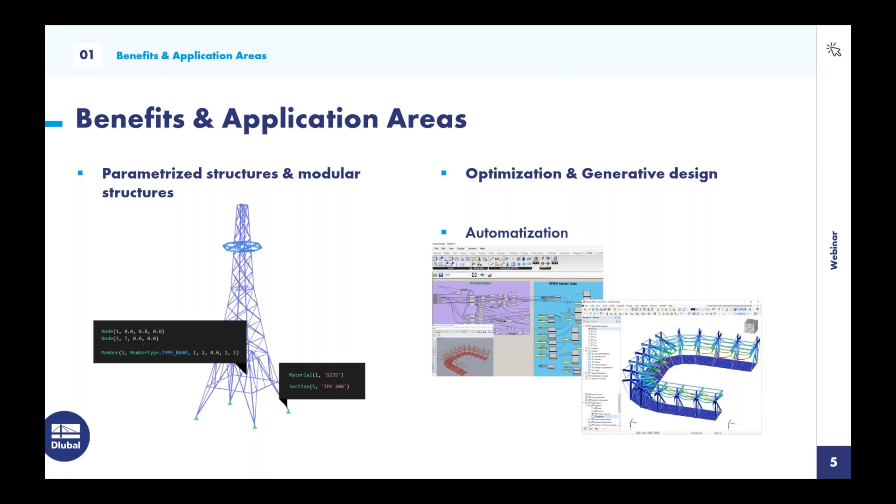Or it is possible to run size, shape, or topological design optimization algorithms. The most fun part is the ability to communicate between a wide range of software. Beyond that, one can create their own applications or own plugins on top of RFEM 6. There will be examples showing how to make that happen.

So what is an API? API stands for Application Programming Interface. It is basically a messenger. It takes requests, translates, and returns responses. It is a communication protocol between multiple software or services to interact with each other. To understand the concept better, here is an example. A graphical user interface is the communication protocol between humans and software programs. Most of you are using the RFEM interface and give the program commands with the help of buttons or inputs. Well, in our case, API has the same function between one software and another.

What are web services? Actually, web services are a form of API, and the distinction lies in style and the way of communication. Web services are XML-based information exchange systems. In our case, we are using an HTTP technology called SOAP, which stands for Simple Object Access Protocol, to make this connection happen. To use this connection in structural analysis and design, frameworks prepared by our team serve very basic functions, which enable the user to give RFEM commands and get responses.

So what's the difference between COM and web services, and why have we changed our technology? Well, RFEM 5 is a native Windows application. It only runs on Windows operating system. RFEM 6 is a platform-independent software which is compiled on Windows, Mac OS, and Linux.

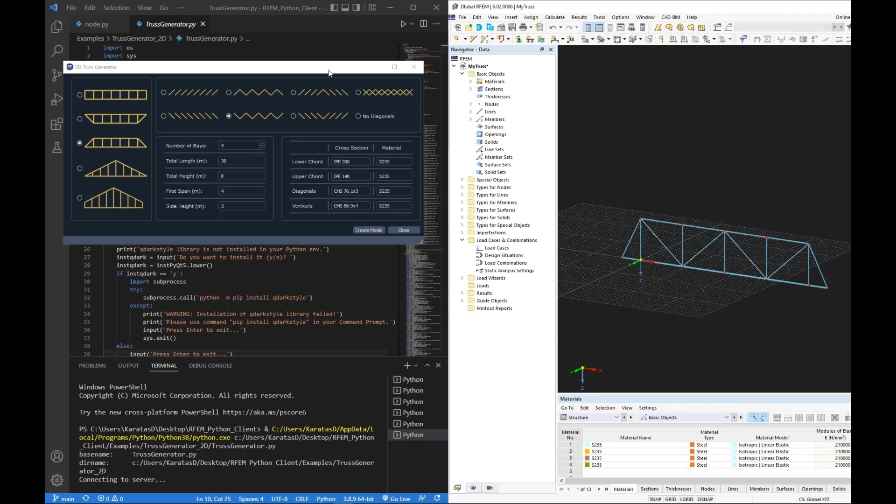Yeah, it's a cool example, I think, and I'm going to show you some other examples. Let me open my new folder. I have prepared some examples for the webinar.

Here I have a tank creator example, which is a console application. It takes 3 inputs for creating a steel tank. These inputs are diameter of the steel tank, height of the tank wall, and height of the arc.

If I'm going to run this file, there will be a new model named steel tank, and there will be some inputs in the terminal for the parameters.

Okay, my model is created, steel tank, and my terminal is asking me diameter of the steel tank. Let's say it's 12. The height of the tank wall, let's say 6. And height of the arc is 2.

I'm clicking enter, and objects are updating. Objects are updating in the RFEM now. And my tank is created.

If you would like to edit this script to your needs, you are free to do that and create your own console applications or your own graphical user interface.

It's that easy. Okay, now I would like to create an example from scratch, and I will be coding this and explaining every line step by step.

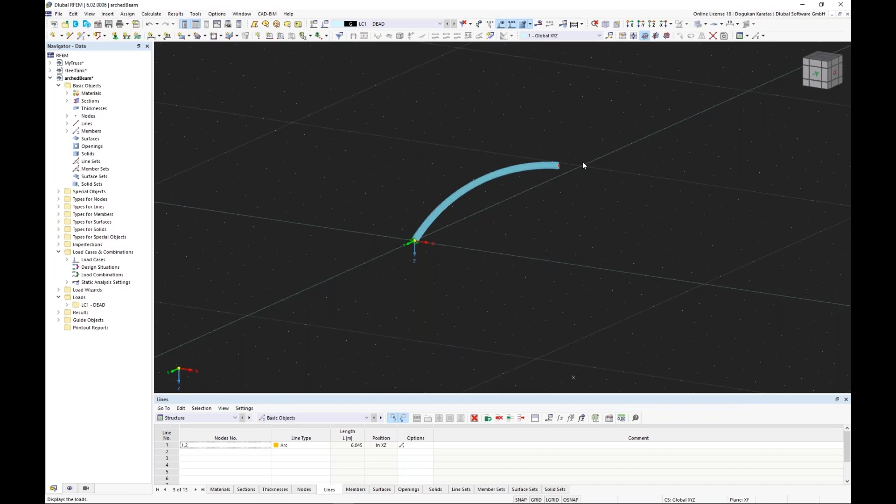And you can see the loading by clicking this. You can see this is a projected load. And of course, since we have calculated, the results are already ready. You can click the results and see them here in the model.

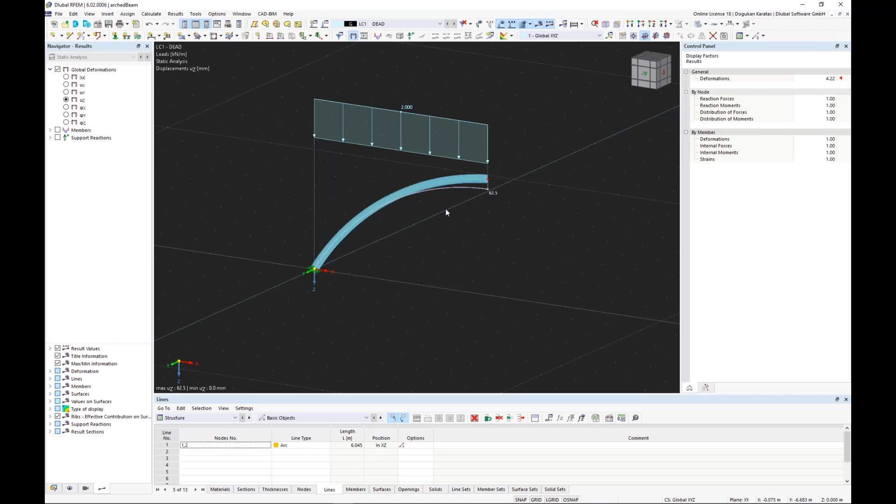But for the post process, you would like to get the results out. So I would like to show you some examples how to get the results out. We have some libraries for exporting results named import export, and I would like to export the results by importing some classes here.

You have some choices here: export to CSV, XML. I would like to show you CSV, and also the XML file with the result tables here. Additionally, we have a report, which is in HTML context.

I'm going to import it also, export result tables to HTML. Okay, I'm going to export my results. Let's begin with the CSV. I'm opening my brackets, and the only attribute is the path. I just want to give the same path here, copying it, and I'm going to change this name as results CSV.

I would like to create some results tables to XML. I'm copying the same path and renaming it as results XML. And finally, I would like to export results to HTML. I need to give the path again, results HTML. I have to use the R here.

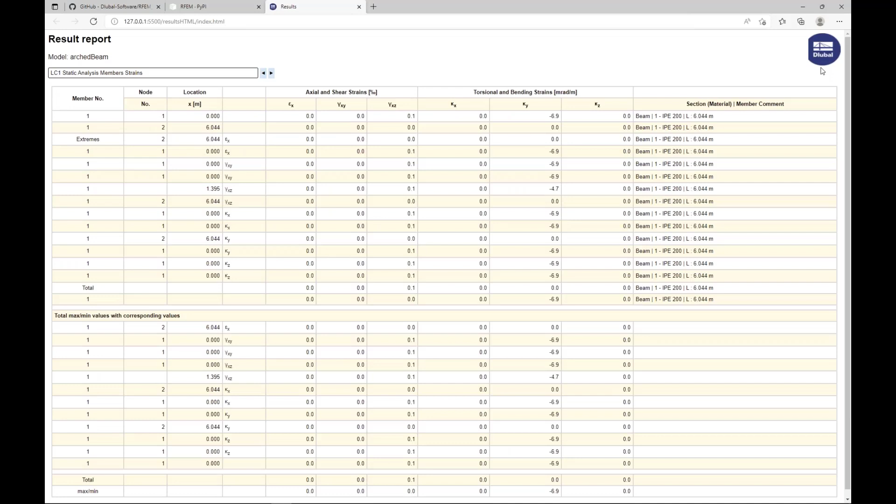All the reports are ready here. You can see we have a logo here, or a table configuration. You can go to HTML styles, or in index.html, and change your icon, change your workflow. You can modify this HTML creation however you like.

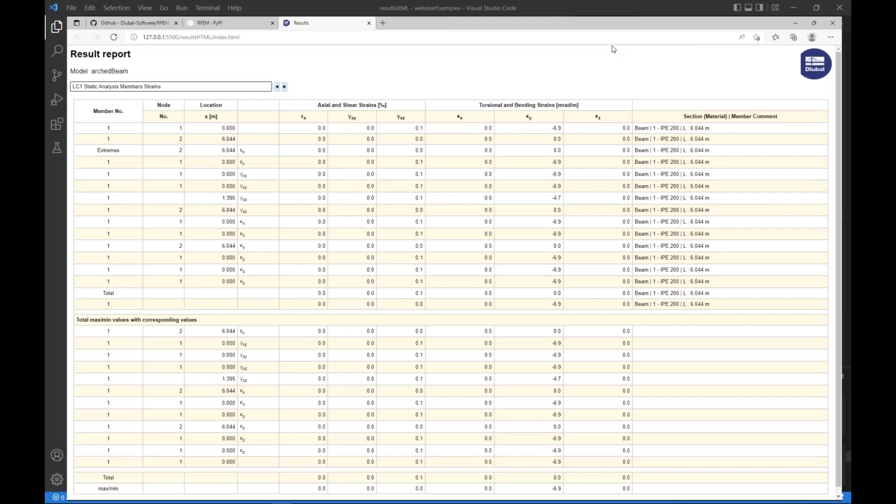I think that's all I can show you. And now I would like to hand over to my colleague Jaroslav for the C# examples.

Okay, thank you, Dogukan. I will show my screen. Okay, so just reshuffle it a bit.

So I will start with the same entry point as Dogukan did, because what I would like to present is also publicly available on our company GitHub. Here I'll be using the code stored in the repository called Dlubal C# client. And here you can download the code in the same way as Dogukan showed you for the presentation related to Python.

What I would like to do is to just show you how it looks if I download it. So I have an example which is called Cantilever, and if you open it in Visual Studio, it looks like this. There is just one CS file which contains all that we need.

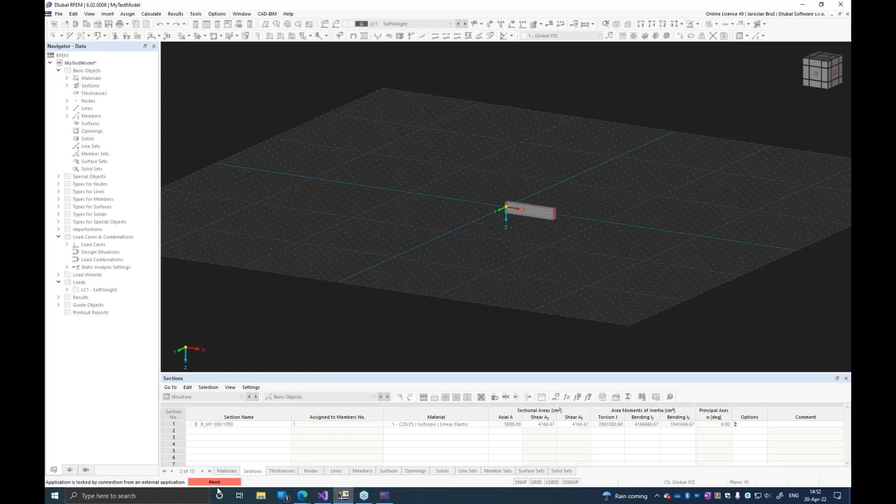It could be useful in the case that you are in the experimenting phase of the development of your application and you need to abort the connection because your application crashed, and you need to work also with RFEM, so you can do it here. So I will break the connection, and here I'll just show that I'm using only the self-weight for

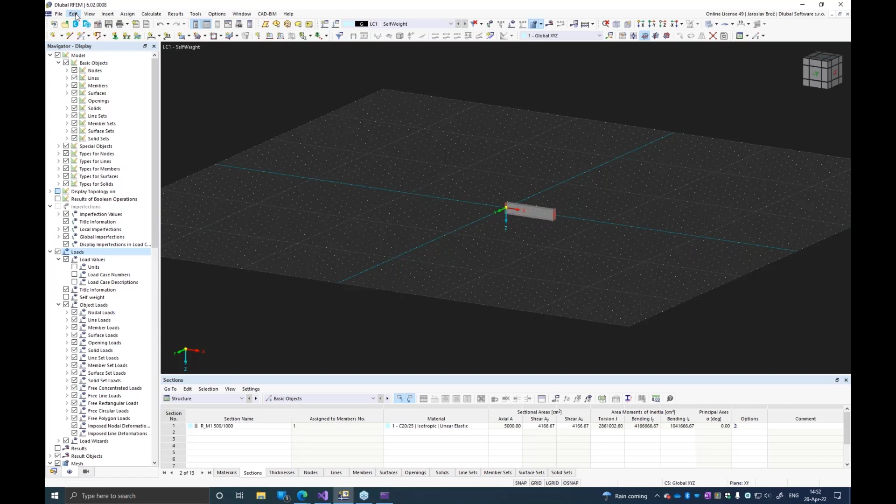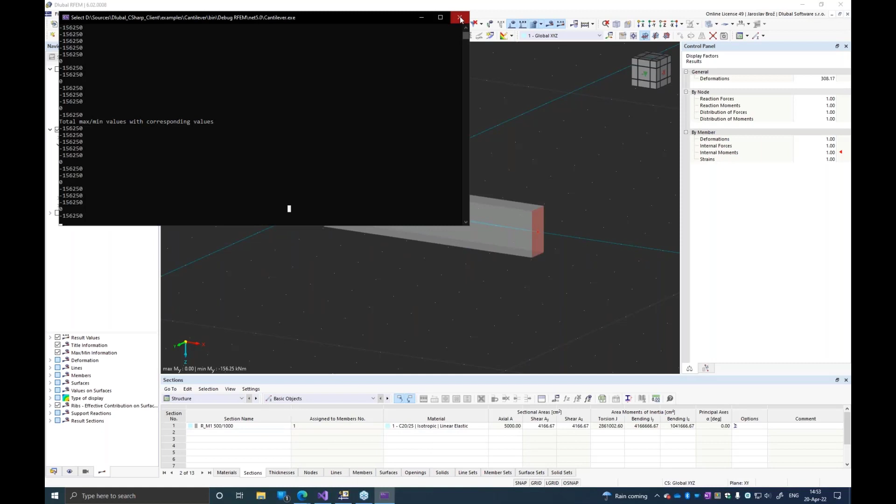the demonstration purpose. And I will also show the results, so you can see here that I have them calculated, and there are some values which have been presented in SI units, which means newton meters. Here you can see it in kilonewtons. So I will close this and stop this. So basically, this is what I would like to share with you.

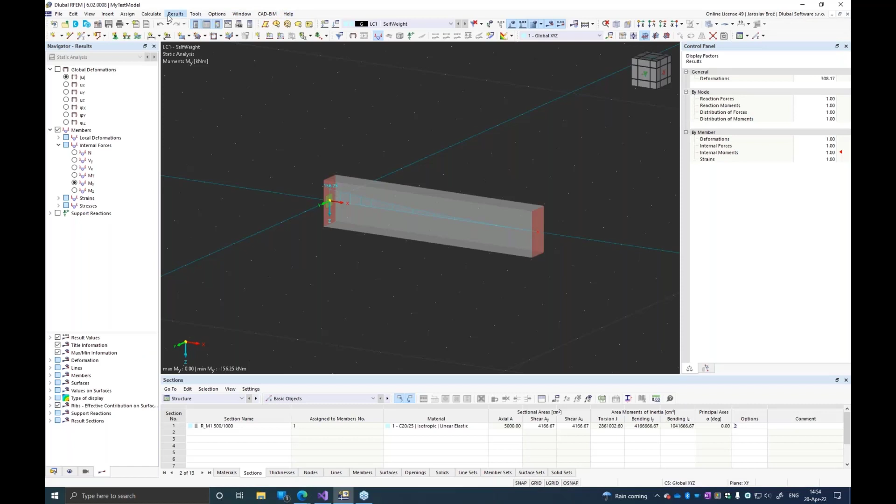I can do also the same for RSTAB, that I will just switch it here into RSTAB. Then it slightly changes the view in the IDE. Now I'm using the DLL or the library for RSTAB. I can work with it. What I need to do is to be sure that here I have the right address for it. I can also open RSTAB and go to the program options

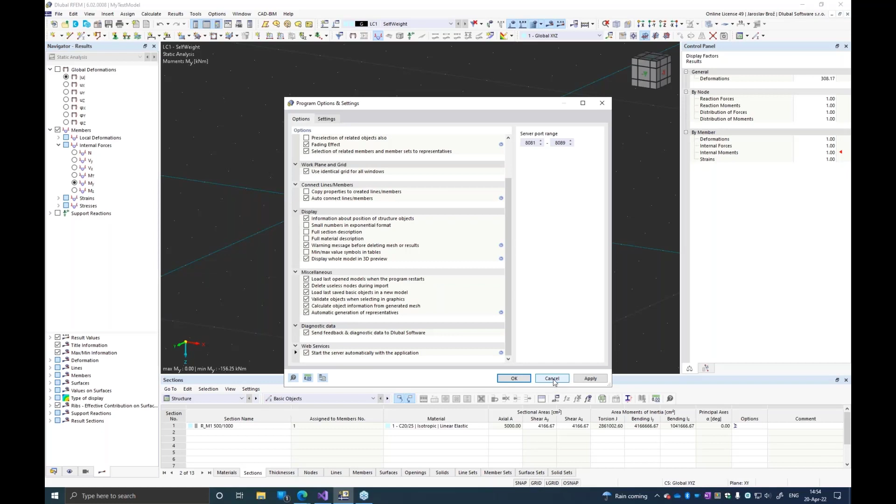here, to check the server port ranges, because if I would like to use, let's say, simultaneously RFEM and RSTAB, I need to differentiate the port ranges, because it will be a different URL address. That's it, what I wanted to demonstrate with such an example here.

Let me briefly check that there should be also the object browser, where I will try to find my library. If I have it here, I'm quite lost. So let's do it differently through this. Basically, here you can see which options you can use for the application, and the same is also valid

for the model. There is also one option which could be presented, because if I have a running application, I can just type into the URL address box localhost:8081 WSDL, and I can see the description of the requests and responses which are done in the background. I can use also some extensions to see, and here you can see what methods you can use for the application.